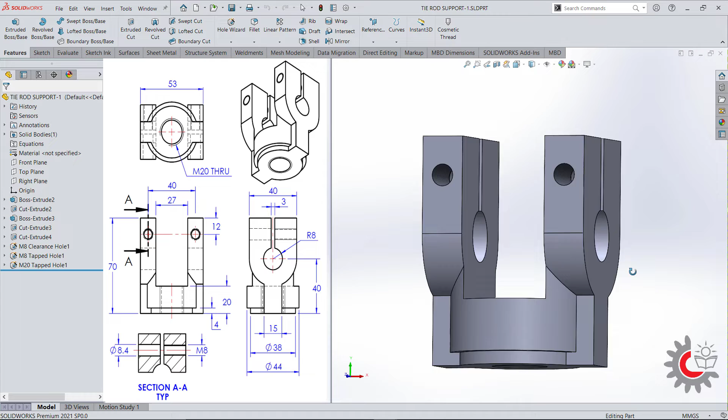This part is called tie rod support. One end of the tie rod will be screwed onto this hole. A dowel pin will be placed on these holes. A set of two holes are created here to provide a tightening bolt.

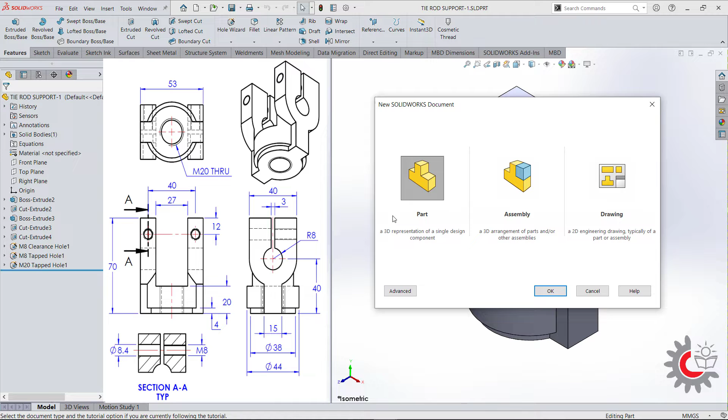The required dimensions are given here in this drawing to create this part. Let's get started. To create this part, I will start with a new file. For that, I will go to File, New. You can select your own template or you can continue with the default SolidWorks template. So in my case, I have already started my new file. I will continue with the same. For that, I will go to Window. I will open the file.

First, I will start from this cylindrical base. The dimensions are given here, dia 38, dia 44, and total height of the component is given here 70. Then I will go to create this profile. This width is 53. The hole distance from the bottom reference is 40. This dia is 16 and this width is 40. This cutout gap is 3.

Then I will go to create this cutout. The gap is 27. From the bottom reference to this face is 20. And I will go to add this set of holes. The hole details are given here in this section. On one face they added an M8 hole. On another face they added a clearance hole for the bolt. At last I will go to create this tapped hole. Let's begin.

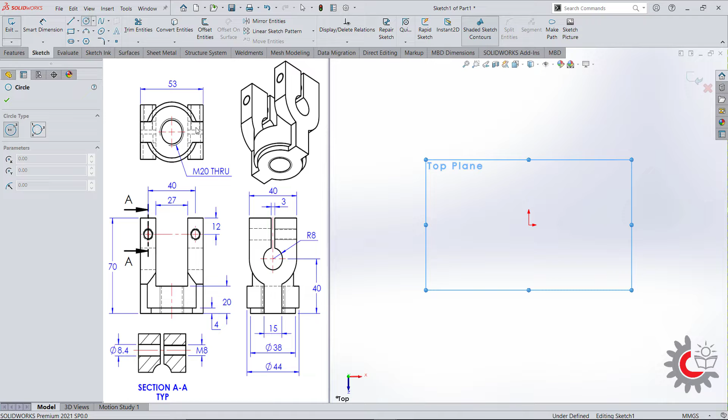First I will start from here. For that I will select the top plane, create sketch. Now I will create two concentric circles. For that I will go to circle, start from here. I will go to smart dimension, select the circle. This dia is 38. Select the circle. This dia is 44. Exit from the sketch.

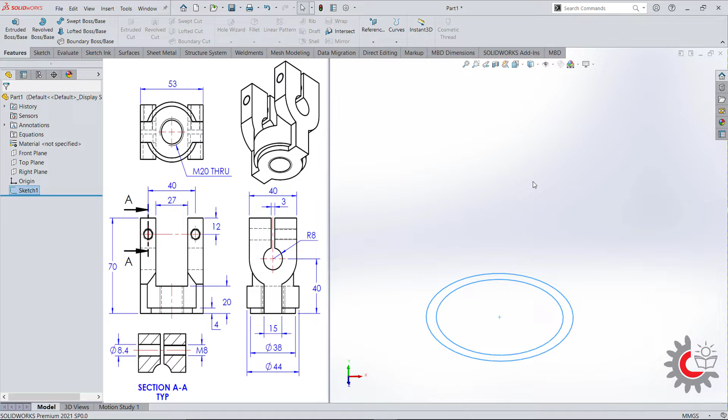I will go to extruded boss/base. So in the contour selection, I will clear the selections. Then I will select this outer circle. The depth I will add 70. Say enter. Say OK.

So now I will create this cutout. So the depth is given here 4. For that I will expand this feature and select the sketch. Now I will go to extrude cut. Here in the contour selection I will clear the selections. Then I will add this region. The value I will enter 4 and I will flip the direction. Say OK.

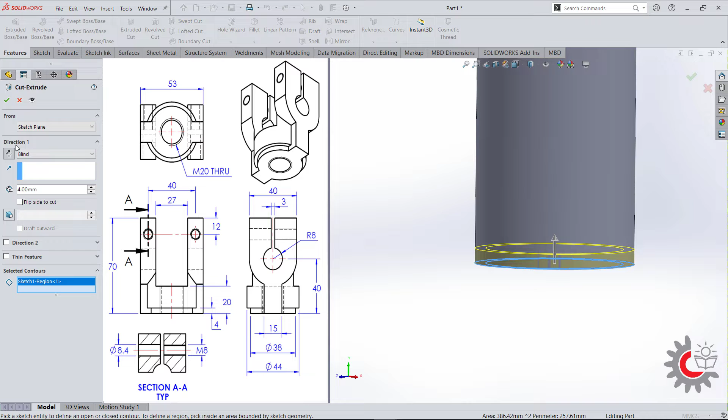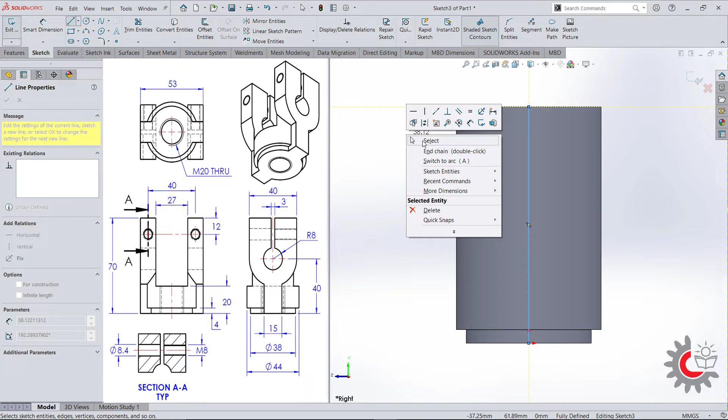Now I will create this profile. For that I will go to right datum plane, create sketch. First I will create a center line. For that I will go to line. I will start from the origin and to the midpoint. Right click, select this line, make it construction. I will go to circle,

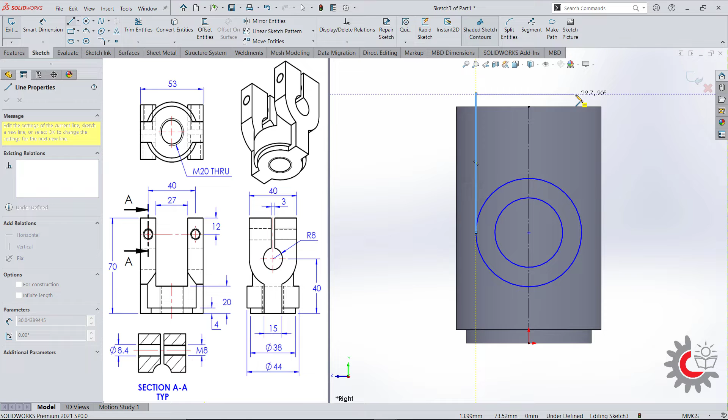I'll go to line. I'll start from this quadrant point of the circle. I'll select this line and this point, make it midpoint. Now I'll go to trim entities, trim these entities, say OK. I'll select this point, make it tangent, select this point, make it tangent. Then I'll select this point, hold the control key, this point and this point, make it horizontal.

Now I will try to drag this. The symmetric relations got added here. Now I'll go to line. I'll start from here. I'll try to make it coincident with that arc. I'll select this point. I'll make it coincident with this arc. Now I'll select this line and this point, make midpoint. Here also the symmetric relations added.

Now I'll add this 3 mm gap. For that I'll go to line. I'll start somewhere here. Right click. Once again go to line. It starts from here to here. Now I'll select this line. Hold the control key. This line and the center line. Make it symmetric. The symmetric relation got added here.

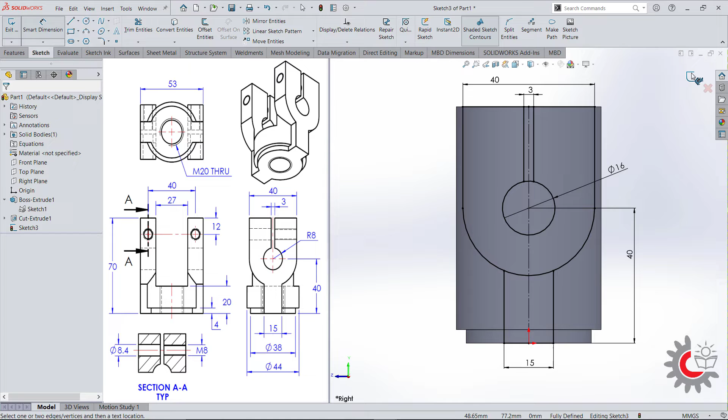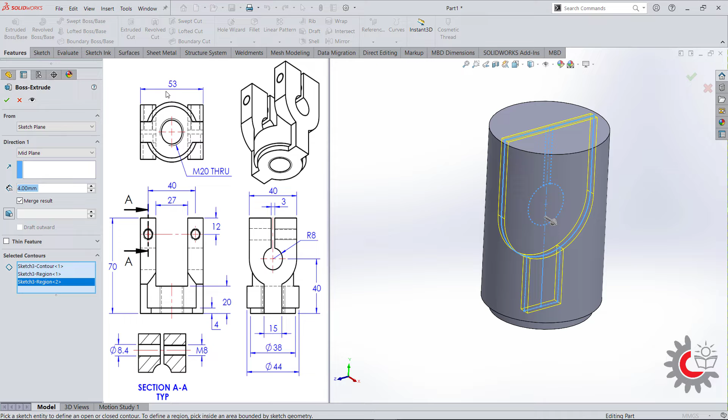I'll go to extrude boss. So in the contour selections, I'll go to select this outer contour and these regions. In the direction, I'll come to mid plane and the width is 53. Go to add 53, say enter, say OK.

Now I'll go to create this cutout. For that I'll go to front plane, create sketch. Here also I'll go to create the center line from here to here, right click, construction. I'll go to rectangle, I'll create a rectangle, right click, select. I'll go to select this line, hold the control key and this point, make midpoint.

So now I'll go to add smart dimension. This width is 27 and from the bottom reference to this face, this is 20. Now I'll go to create the references for these two holes in this sketch itself. The pitch value between these two holes are given here, 40.

So for that I'll go to line, midpoint line. I'll start from here. I'll say right click, say construction. Make sure that this line is horizontal. I'll go to smart dimension. The pitch value is 40 and from here to here it is 12.

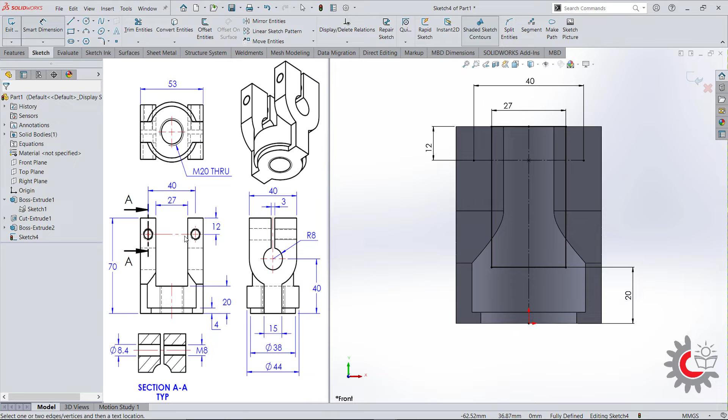These two end points of this line I'll go to use for the center of the holes. I will exit from the sketch. I'll go to extrude cut in the direction, say through all both sides, say OK.

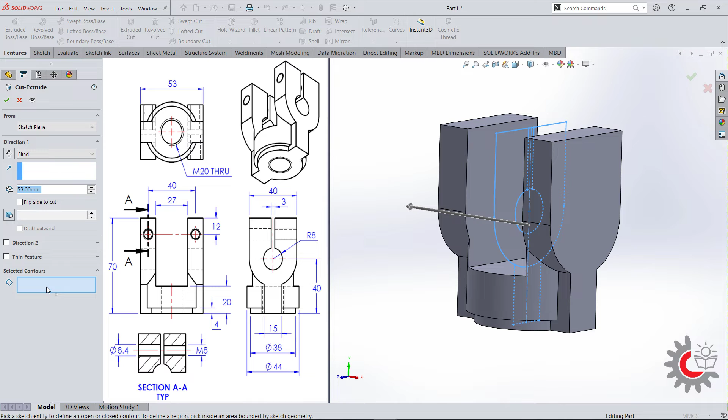Now I want to create this cutout. So for that I'll go to expand this feature. I'll go to select this sketch. Now I'll go to extrude cut. Here in the contour selection, I'll go to select these regions. I'll come to direction through all both sides. Say OK.

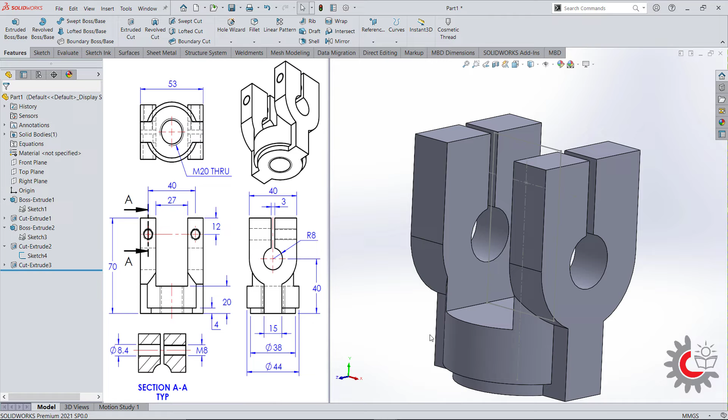Now I'll go to create these holes. So for that I will go to expand this feature. I'll go to select this sketch, make it show. Now I'll go to add the holes. For that I'll go to hole wizard. First I'll go to create this M8 tapped hole. So for that I'll go to select this hole type is tapped hole.

So from here I'll go to select ISO. The type is bottoming tapped hole and the hole size is M8. I have selected M8 and the end condition of the hole is up to next. Drill is also up to next and the tap is also up to next. I'll come to position. I'll go to select this face. First I'll go to place the holes on this face somewhere.

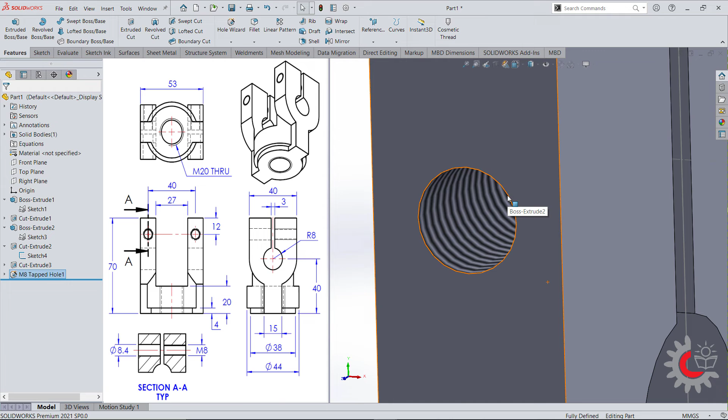So right click, select. Now I'll go to select this hole point and this point of the sketch, make it coincident. Same thing for this hole also. Select this hole point and this sketch end point, make it coincident. Say OK. So M8 holes are created now.

Now I'll go to create this clearance hole for M8 bolt on this face. So for that I'll go to hole wizard. I'll go to select the hole is a drilled hole. I'll go to select this simple hole. So standard is ISO. So here the type of hole is screw clearance hole. I'll go to select this screw clearances.

So for which screw I want to create a clearance hole, I need to select that screw here. I'll go to select this M8. For M8 bolt I want to create a clearance hole. So here I can define the gap, that is a close gap, normal gap and loose gap. I'll go to select this close gap to achieve this 8.4 dia and the end condition is up to next.

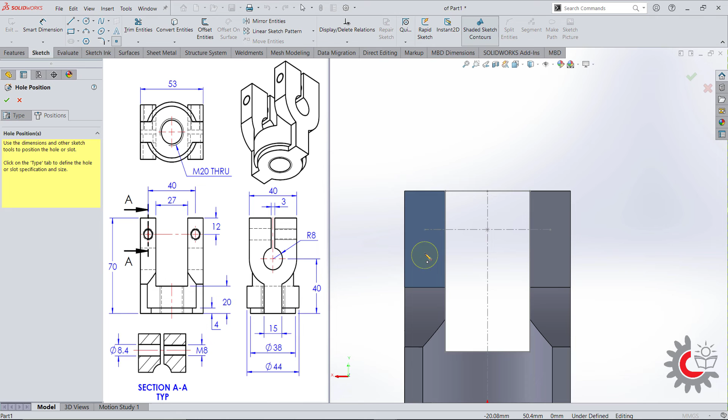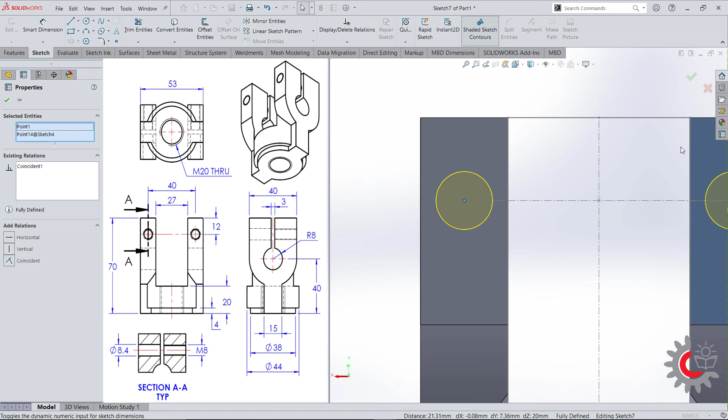I'll come to position tab. I'll go to select this face. First I'll go to place the hole somewhere on this face, right click, select. Then I'll go to select this hole point, then the sketch end point, make it coincident. Same thing for this hole also. Select the hole point and the sketch end points, make coincident. Say OK. The clearance hole is also created now.

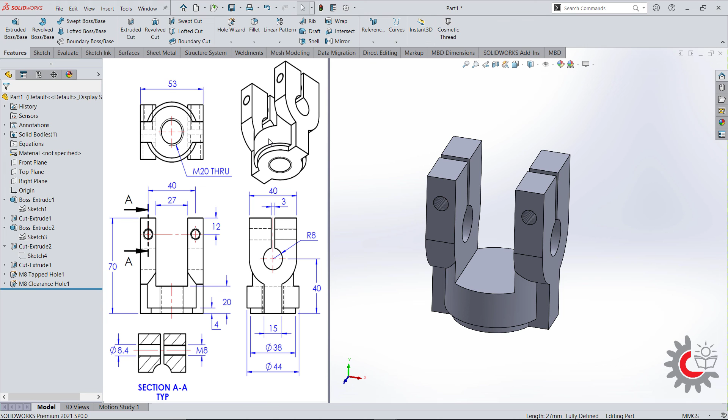This sketch is no more required. I'll go to hide this sketch. For that select the sketch, say hide. Now I'll go to create this M20 tapped hole here. For that I'll go to hole wizard. I'll go to select the hole type is tapped hole and the standard is ISO. Type is bottoming tapped hole and the size is M20. The end condition is drill is also up to next and tap is also up to next.

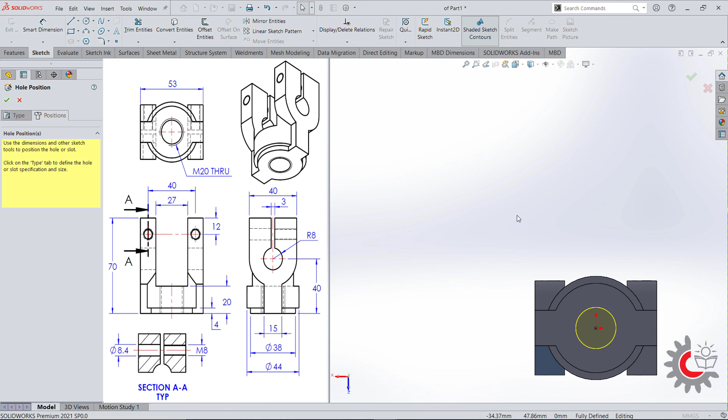Come to position tab and I will select this face. Then I will place the hole. Right click, select. Say OK. So we have done with all the features.